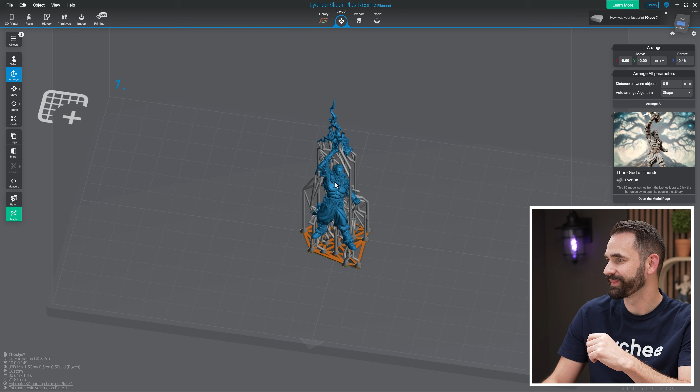So first thing, we need a model. For that, I'm going to head over to the Lychee Library and grab this Thor by Ever On. Just going to click on it right here and click on download. That's going to download one that's actually pre-supported. However, we want to learn something today, so I'm going to go through and delete those pre-supports. Let's click on them, go to prepare, grab them all, and hit delete.

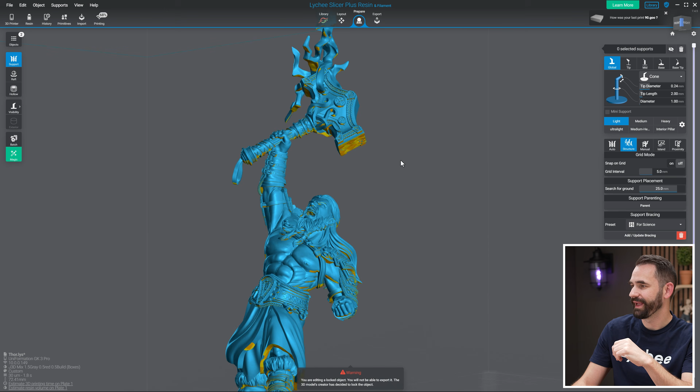All right, so the very first thing I need to do is make sure the orientation is what I want. Everyone has a slightly different way of doing it, mine might be different from this artist. The way to do this is I'm just going to look at it from underneath and see the overhang. So far, everything looks okay, but what I remember is that this guy has Thor's hammer. And if I look at it from the bottom, I can't really see the bottom of Thor's hammer from underneath this character.

So what that means is I'm going to go over to layout and hit R for rotate. I'm just going to tilt this guy over a little bit, maybe even back a little bit more until I expose that hammer. I want this edge right here to be visible from the bottom of the build plate. That way the supports can reach from the build plate all the way to the hammer.

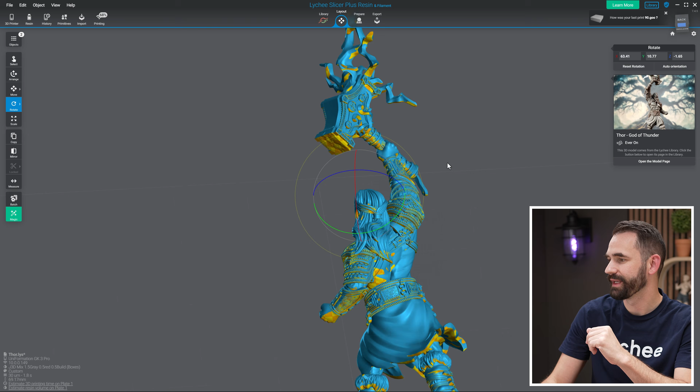So now that this guy's oriented in a way that I think is going to be a little bit easier, let's get to supporting. For that, I'm going to click on prepare, move my slider all the way up so I can get a full view of what's going on.

Now, just looking at this model right here, let's kind of explain what goes through my head. The first thing is, of course, I want the feet, the arm, and the hammer. These are what I call key components. If I support all of these key components pretty well, overall the vast majority of this model is going to print. After that, I'm only going to worry about the smaller islands and details, and I'm going to do it in that order: major key components, then smaller islands, then overhangs.

And then finally, at the very, very end, I might worry about stabilization, and I'll get to that part towards the end of this video.

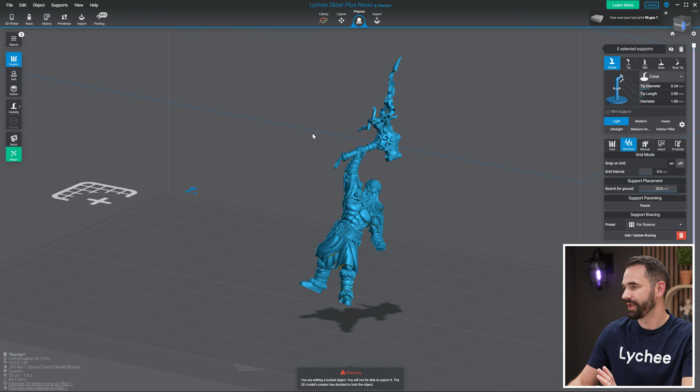So first, the key components we've identified are the arm, the feet, and the hammer. Let's isolate just the feet first to get an idea of what that looks like. I'm going to use the slider right here to drag it down until the only thing I can see are the feet. So these are the first things I want to support.

To do that, make sure support is selected, and I'm going to grab my heavy support. The reason for that being the bottom of these feet are never going to be seen in the light of day again once they're glued onto a base or something. So I'm going to use some heavy supports.

My heavy support tip is 0.4 millimeters. That's the largest that I use for anything from minis to massive models. The difference is that for massive models I use lots of supports, and for minis I'll just use less.

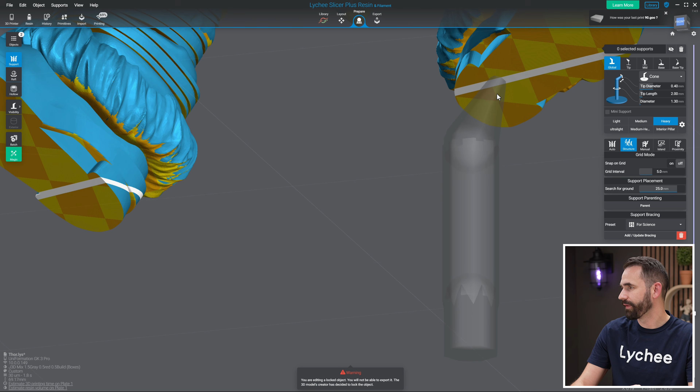First thing I want to do is grab the very, very bottom. To do that, I'm just going to move down until you see that white mark right there. That's the very bottom, that's where I'm going to place the support.

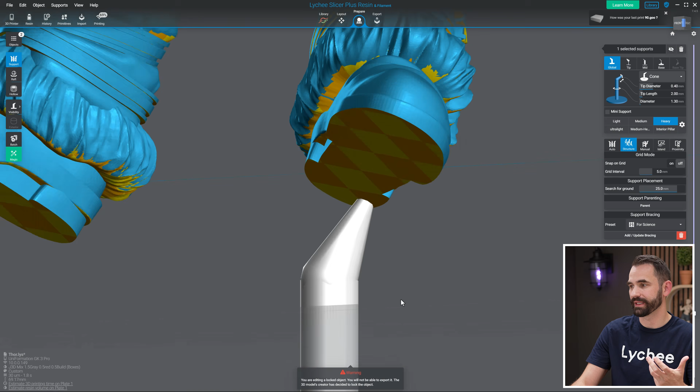Now I want to see this support from a different view. Wherever my cursor is, if I hit F on my keyboard, the camera is going to move and center on where the mouse was. That way, when I rotate, it's going to be centered around where my mouse was at the time. If I leave my mouse here and hit F, it moves, but if I keep hitting F, it doesn't do anything. If I move it around and hit F, it moves again. So that's a really good trick to center your camera.

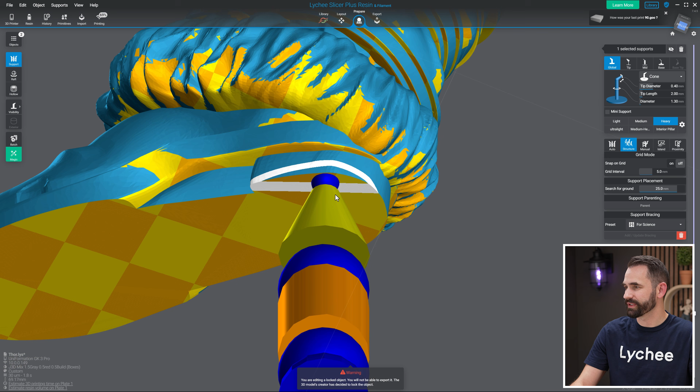From here, I can see that the support isn't overhanging. I wouldn't want it to look like this, where it's overhanging. I want it to be slightly underneath. If I want it a little bit further away from the edge, I'll hit space, make sure that support's selected, hit space, and then drag it further away, and it's a little bit better. From here, I'm just going to go through and place a few more supports.

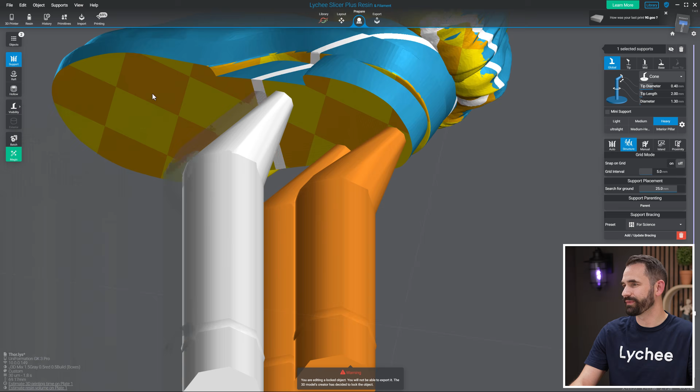Again, this is underneath the model, I don't care, so I'm going to kind of grotesquely over-support the feet here. We'll do the next one, same thing: click it, hit F, rotate. Probably could be a little bit further away, right there. Let's add a few more supports onto this foot just to over-support it, that way I know that leg isn't going to fail.

All right, so the legs are done. Also finished are the short supports. The short supports I want to be straight, but the taller supports I want to use the Lychee Slicer grid supports to save some resin and complexity and avoid some issues. So now I'm going to go over to structure and make sure I turn snap to grid on, and I'm going to keep it on for the rest of this video.

So now I'm just going to move the slider up and let's isolate that arm right there, because that's the next key feature moving up. Let's get that arm nice and centered, and let's kind of move this back down until that arm is isolated, just about right there. That's good enough. If I want to dial it in, I can use the up and down arrow keys on my keyboard to go through the layers one at a time, but right here is going to be good enough for what I'm looking for.

So now let's look at this arm and get an idea of how big it is. It's in a weird position where it's parallel to the build plate, the forearm right here. Not the best, but it's just the way it's going to have to be, for the reason of the hammer and some other reasons, it's oriented this way. But it's not a big deal.

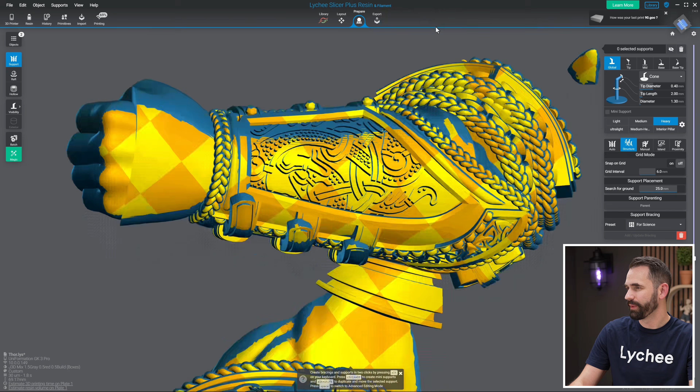The biggest island I want to think about right now is just this hand. So right here I'm probably going to place a heavy support. This might be the very last heavy I use for this entire model. We'll see how it goes. Actually, no, I might use one more here on the back of the arm, just as this thing's kind of big, and I want to make sure that both the hand and the elbow are well supported.

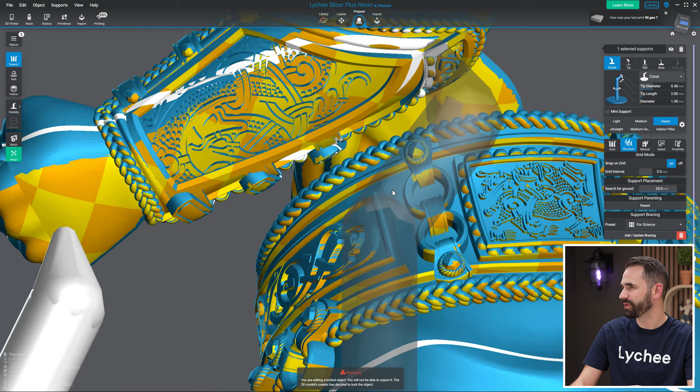And then the interior, I can use smaller supports, or between the two, smaller supports. So I want to try to squeeze one here in the back where it won't cause too much damage to the model. I think the best place for that is probably right here on the top. You can see my support tip is slightly bigger than the feature it's attached to, so I'm going to go down to a medium heavy, and that's looking a little bit better. All right, so I think that major island is done.

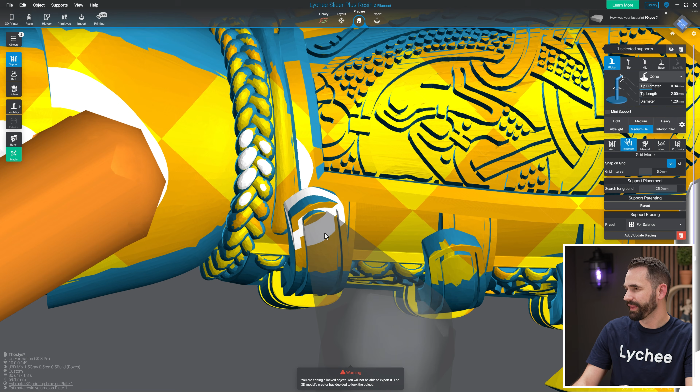Now let's move to some of these smaller ones. What I have right here is these belt buckles. I think they kind of stick out a little bit. They're going to be really easy to place a support tip to reinforce between the arm and the elbow. The medium heavy here is probably a little bit big. Let's go down to just a regular medium. That's looking better. We'll put one on each one.

And we can see here we got the snap to grid working, so these supports are kind of auto-parenting together. Let's move to the next key feature.

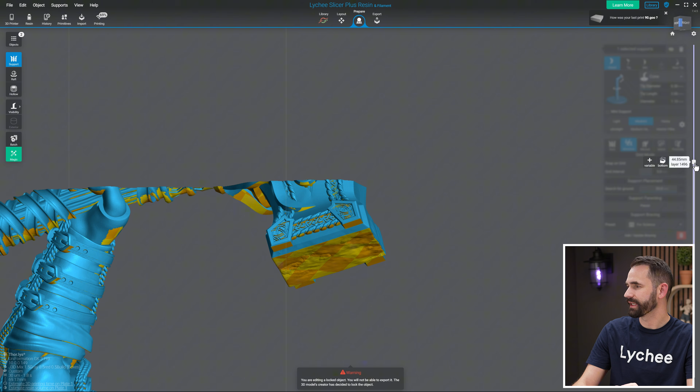That's probably going to be the hammer. So we'll scroll up, get that hammer right there. Let's move that back down, just get an idea of how big that is. That's the island we have to make sure we think it's going to print.

I'm going to start at the lowest point, and I'm going to go back to my heavy support. I'm probably only going to place one heavy support on the corner of this guy. Hit F on my keyboard. Let's make sure it's not right on that support tip right there. And I think from here we're going to move down to like a medium heavy and place one there.

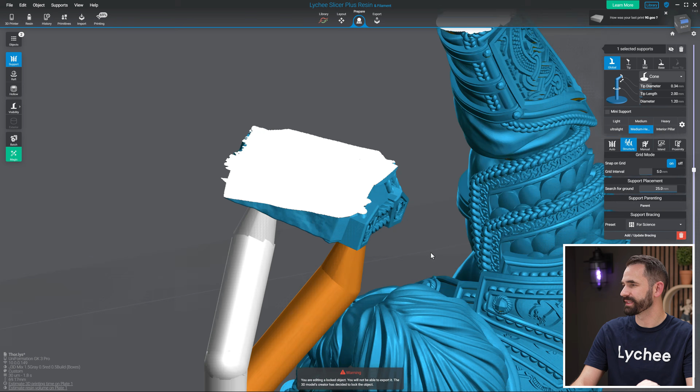If we move this down a little bit, what we're going to see is that the way this hammer prints, or the way it's supported, is it's kind of coming up like a little bit of a triangle, where this is the lowest and this corner right here is printing last. You can kind of tell by the shape. So if we support the part that's lower on the build plate first, it builds onto itself. By the time we get to this thing right here, what that means is as I get further and further away from that bottom tip, I can use smaller and smaller support tips.

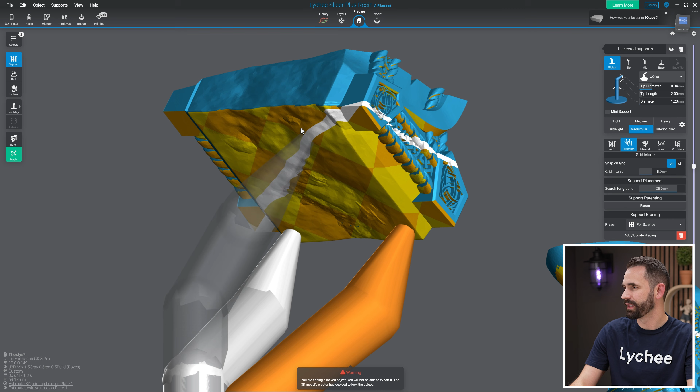So if I come up here, maybe like halfway between these two, I'm going to need another one. And this one I think I can get away with a medium. And then one kind of in the center, because remember, this is building up as a triangle. So maybe one in the center. At that point, I can go to a much smaller support tip, because at this point, I'm pretty sure this thing would print. I'm worried more about overhang, layering, and flaking. But this key component at this point is probably done.

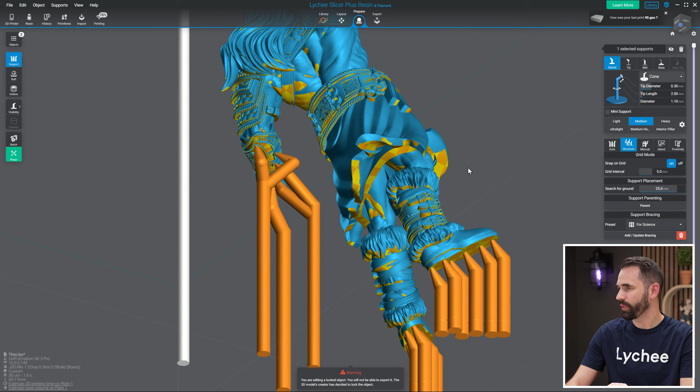And so we'll come back to the overhangs and islands. So let's just make sure there's not anything else that I could consider to be a key component. Quite possibly the back of his cloak right here could be a key component right down here. So let's try to isolate that one again. Move my slider down. We can see what just that looks like. It's a pretty big overhang right there that really sticks out. It's not very heavy because it's kind of thin.

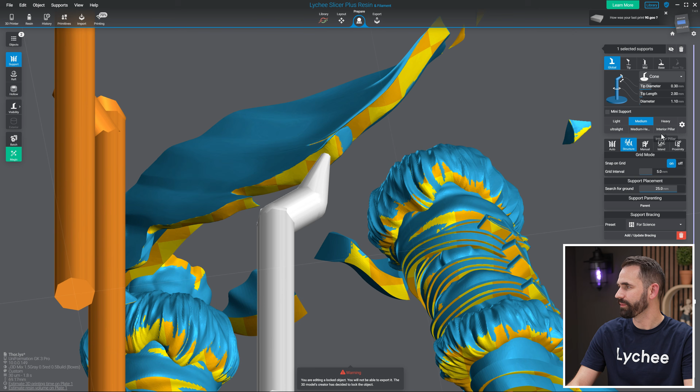But let's place at least one medium heavy there and one there. Maybe one more on this side of it, just like right there. And I think that's it for that one.

There's obviously some islands that haven't been supported yet. What about the front of his cloak? Yeah, we probably got one thing just right there and one more right there.

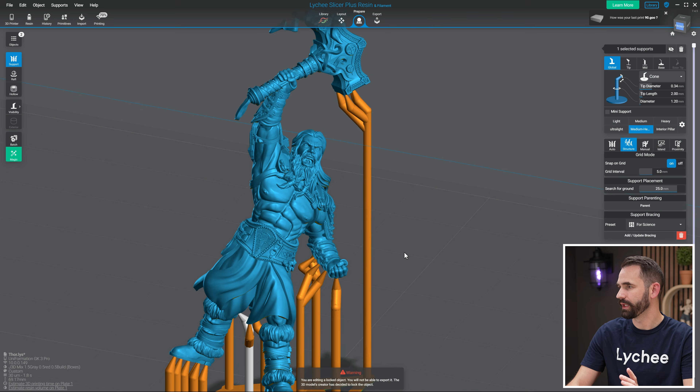So I think as far as the weight is concerned and the pull force, we're taken care of. Now we're going to start searching for islands and overhangs and stuff like that.

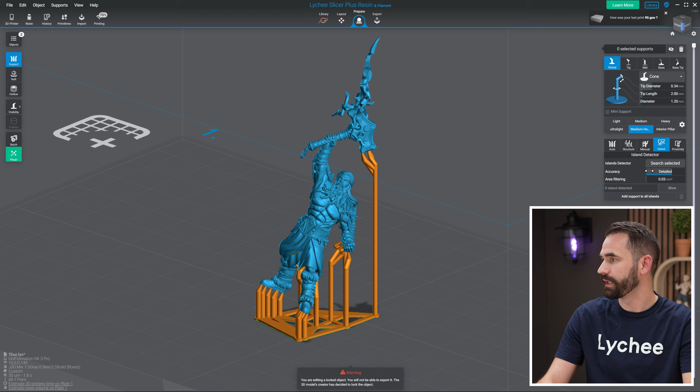For that, what I'm going to do now is I'm going to click on the model, go over to island, and I'm going to do a detailed island search with a filter on of 0.03 millimeters, which means any islands that are less than 0.03 millimeters squared, not cubed, squared, will be filtered out. Let's click on search selected. And now I've got 49 islands that haven't been supported yet.

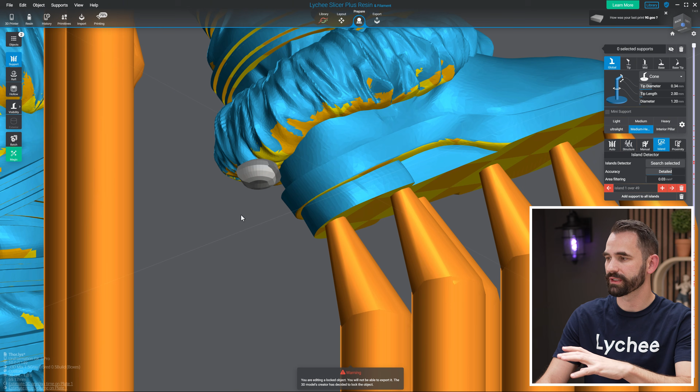This is where I can just click on show, and it's going to go through and start cycling these islands. I can look at each one individually and determine which size of support tip I want to use, just based upon what I'm seeing. The foot right here is going to be supported by these larger ones. So by the time we get here, it doesn't need much.

So I'm just going to place probably a light. Let's delete that, not the best way to do it. I'll put it right on the bottom, just like that.

And since we've got a bit of an overhang here, I can just do 3 of them. The light supports are very, very small, so I'm not worried about support tip damage.

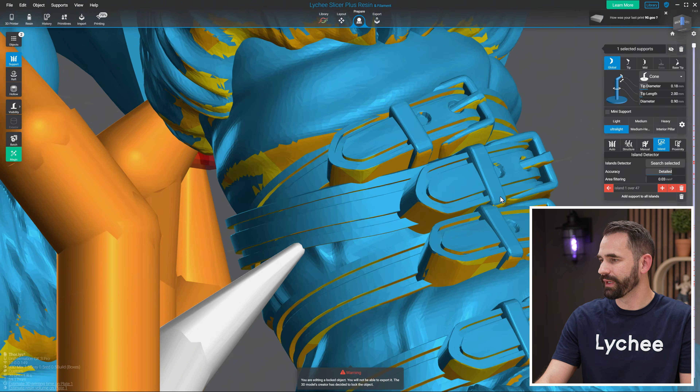When we come up to this one right here, this one's very tiny. I may put ultralight, and honestly, I may even move that one a little bit and make it even slightly smaller. That is a tiny overhang, may not even be worth doing in the first place, to be honest.

When we come up to these bigger overhangs on the back of his cloak, I'm probably going to want something a little bit bigger, so let's reset that back to light. The one down here, it's kind of behind it. Let's probably put that one as a medium because we're on this.

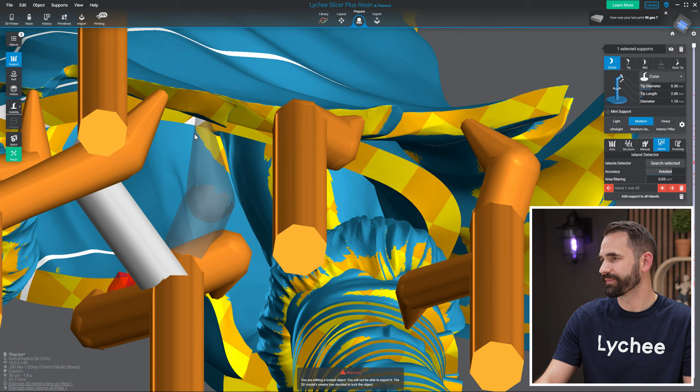It's hard to tell, but there's actually 2 layers to this tunic he's got on. So for this bottom one, we just want to make sure we get a few supports on it. I want that to have a path to the ground right there.

Getting a little close, we can just move it over like that. We can probably recalculate this guy. There we go, that's better.

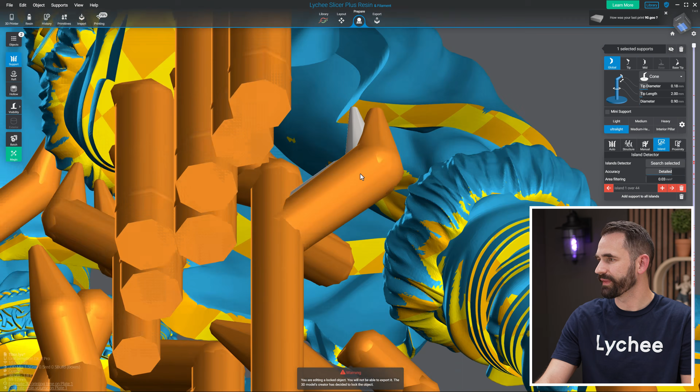And we got a little island right here on the tip. That's probably going to be like an ultralight, really, really small support tip right there. We probably want it right in the center. Just right there is enough to get the very bottom of that cloak going.

We got another one right here, I'll probably just put another little tiny support there. That's probably okay, and then one more in between the gap. That's just because I don't trust that one support tip, this little one right here, to do all the work, so I'm going to have the other one next to it just to kind of help it out.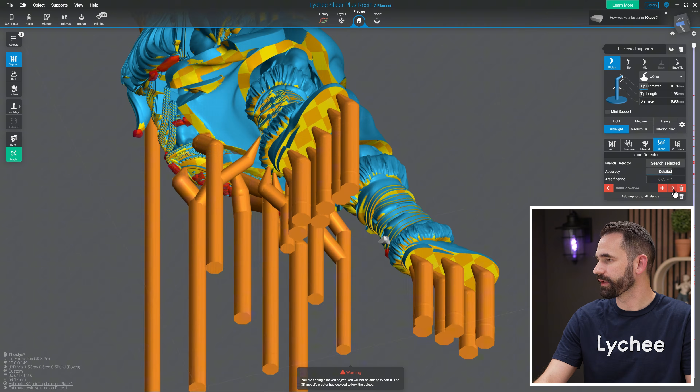All right, let's click on our arrow and look at the next island. Oh, we're here on the other foot. These are really, really small. I don't know if I really need that, that one's so small. We'll put ultralight, same thing on this one, ultralight.

That's not an island there, I don't have to worry about that. That's the bottom half, let's move up.

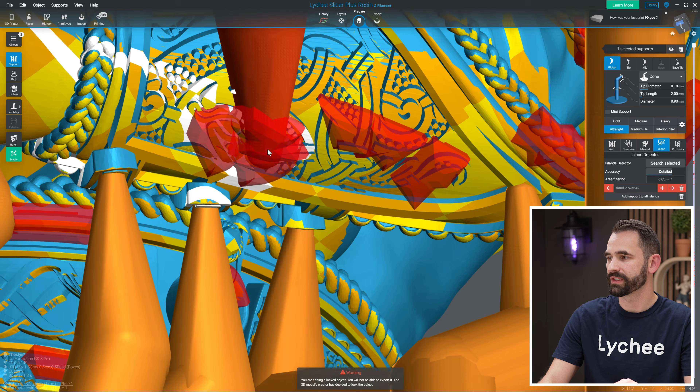We've got this texture right here on the arm. For the texture, this is where I don't want to be plastering supports all over it, you know, something like this where I'm just making a big mess of it, and now I've got all this damage on the texture.

I really only need a couple, and I'm also going to make these support tips really, really small. So, see how I got some support structure underneath it? I can actually use that to make a different type of support.

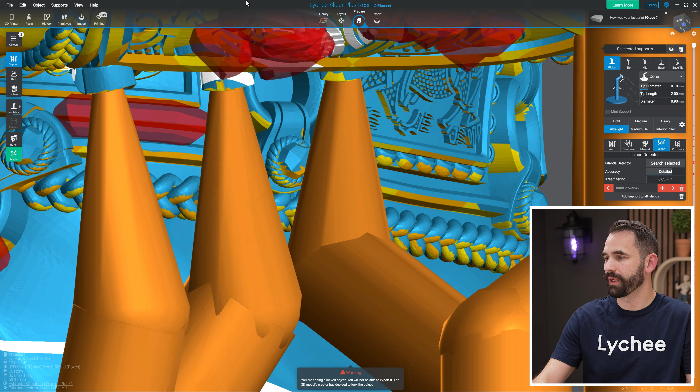So what I'm going to do to get this going is I'm going to place one support tip right here. See how this connects down there on that existing support shaft? I can even drag that around if I want to.

Now what I'm going to do here is make this ball smaller and make the support tip even smaller. Let's say like 0.14, let's go all the way down to 0.12. Really, really small support tip.

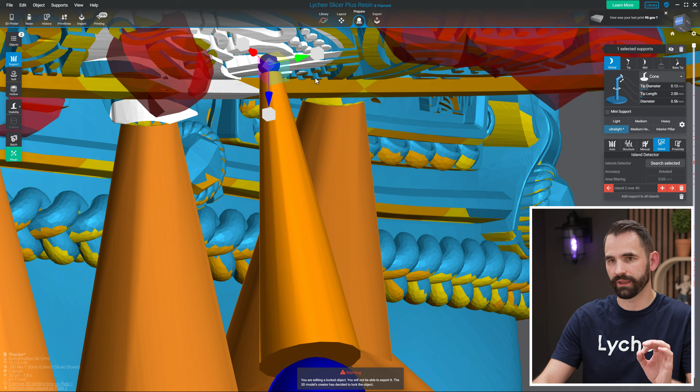Now with this one selected, I can move it around to a better spot. Let's probably put it maybe right here. Now with this guy selected, I can make copies of this one.

So basically what I'm going to do is copy this one all the way down from the support tip size down to where it's connected to this larger support shaft. And that's going to make it really, really easy to place a bunch of these.

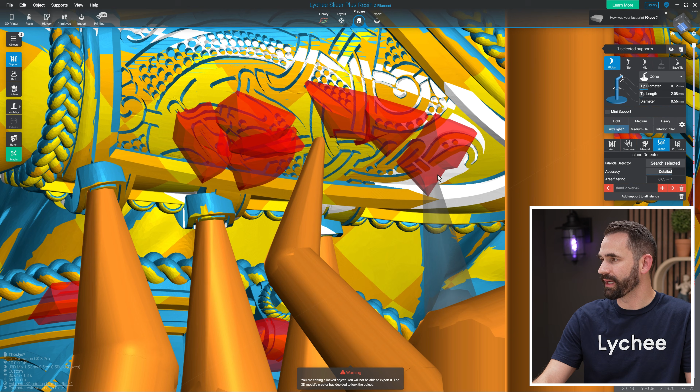And I do that by holding Shift and Alt, and it's going to make a copy of that one. And I can come through here and just kind of place these. There's not like a great place to put them, there's really bad places and not-so-good places, and that's a bad place.

Delete that one, replace it maybe right there. It's kind of hard with the way that texture is doing it, but that's probably good enough right there. Now let's get this arm.

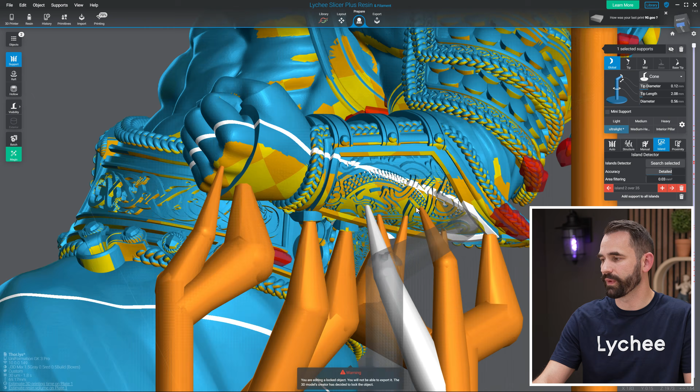If I just don't change anything, I'll use the last one I used, this guy right here. I don't want that for the knuckles, so I'm going to go back and just re-click on ultralight and replace it.

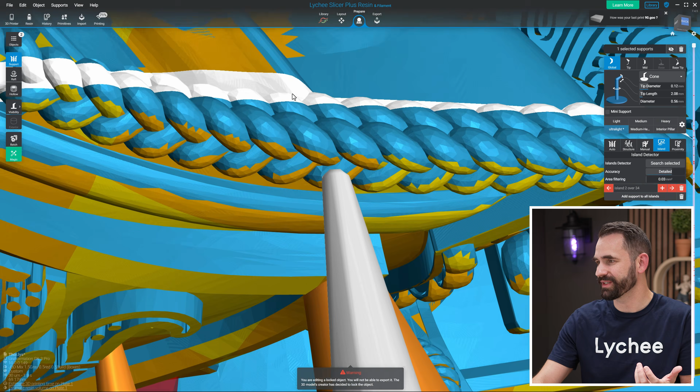Now let's go over to the texture here. This texture is super small, tiny. Even if I go back to this really small tip I made and put it on, you'll see the support tip itself is almost as big as the texture. So I'm probably going to go even smaller on that one, maybe 0.01, as small as I dare to go.

I can do the same thing as before, hold Shift and Alt, and place a couple of them here. I don't think I need that many. At that point we're probably done. And I can even hold Shift and Alt and do the same thing on the ones up here, just place a couple of them.

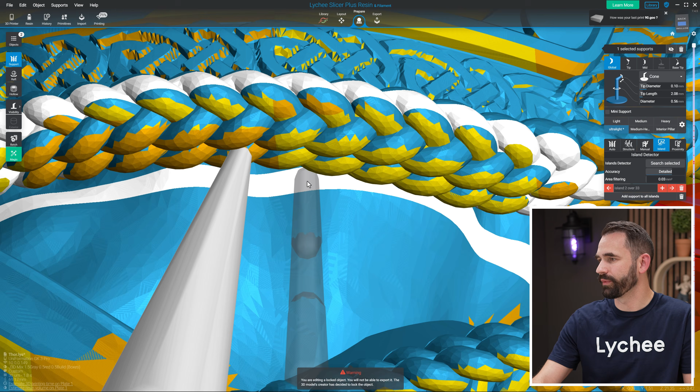I'm probably putting more damage on this model than I'm actually saving by hitting all those islands, but at least it's going to help with this whole overhang right here. Because I don't want this whole armor plate to fail, so these support tips on the islands are also going to double up as keeping that piece of armor from failing and grabbing a few of those islands. I think that's going to be enough to do it, just like that.

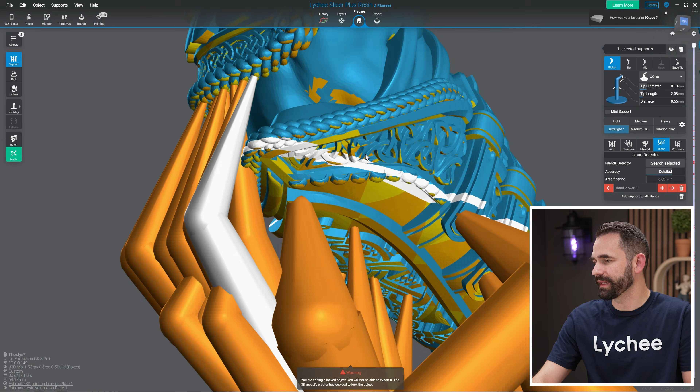The next thing moving up is we've got this hair. That hair is a little bigger. Let's go back up to my light and position it where I want it to be. That's a big piece of hair for one support — I don't trust one support to do a full structure.

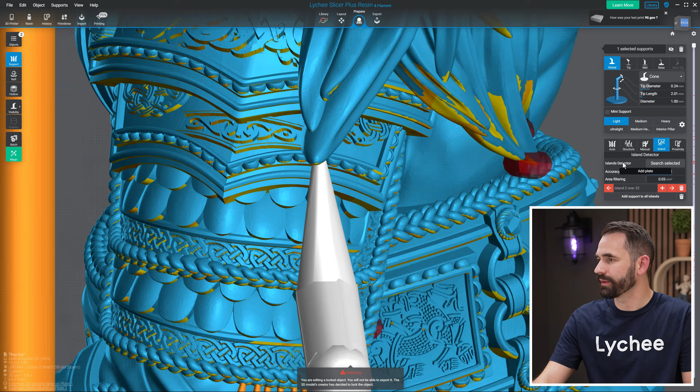So I'm going to come in and add one more, a little bit higher, probably at a different angle, something like that. And this one's going to be an ultralight, very small. I trust two — I don't trust one, but I can trust two.

Over here, this is a little bit larger. Let's see, do I trust a light on that? I'll trust a couple lights — do like two there, one there, one there, and probably one more.

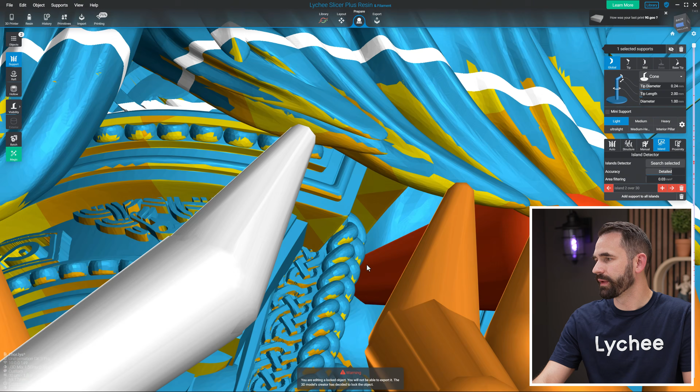Let's see, does that make connection with the body? No, it doesn't. That's a small island right here — let's make that an ultralight, and even smaller right on that very, very small island right there.

I trust that. Underneath the arm, kind of under here, we've got some armor plating and some rings. We're just going to go through and place a couple support tips on that. These are tiny, really, really small. Let's place a couple minis, like three minis. Okay, that's good.

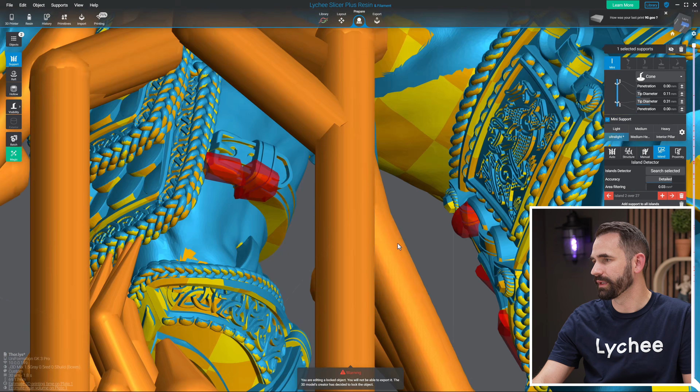The belt buckle is so tiny. Let's see, do I have a good way for that? Yeah, we'll do another mini, right on that belt buckle. I don't like where that placed — let's readjust that, like right there.

Okay, that's probably done, and you can see right now I'm just going through and filling in all these tiny islands at this point. I'm using some really small support tips on really small islands, and slightly bigger ones elsewhere. But as you can see, everything's on a case-by-case basis — there's not just one support tip size you can use to blast everything.

I don't like supporting that way. I like doing everything on a one-by-one basis. It does take longer, but ultimately I think the end result is significantly better.

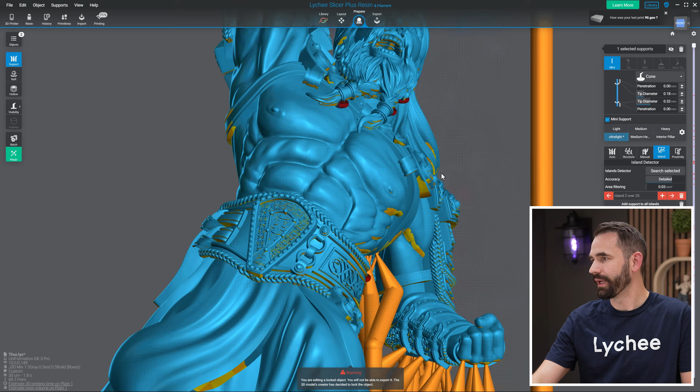Moving up, there's 25 left. I probably won't hit all 25 of them, to be honest. We've got a little belt buckle ring — I probably want that one to be an ultralight. Let's click on that, yeah, it's going to be fine.

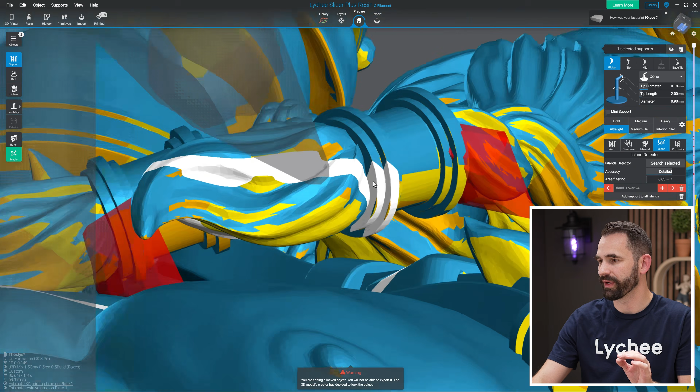All right, we've got something in his beard, if I remember right — we have a couple in his beard. Now, sometimes you have to place a support that's going to stay on the model permanently, just kind of hidden underneath features. An example of that is his beard right here. Right here there's a little bit of an overhang. If we place a support tip right there, you can kind of see it's — I don't know if you can see or not, it's hard.

But with this model, you're never going to see that support tip, it's just going to help the thing print. There's a couple underneath his beard we're going to grab that are going to be the same way.

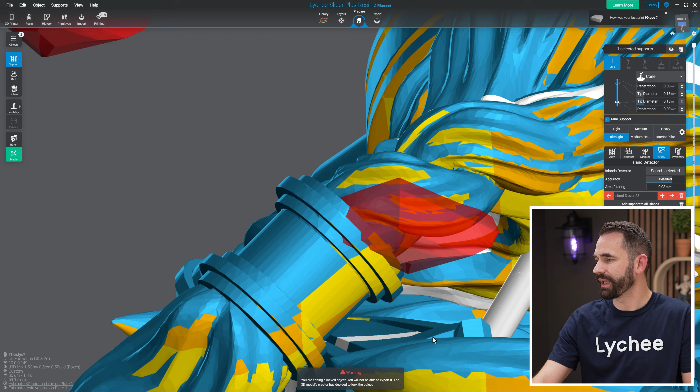I'm going to snap it there, and if I hold down Control and Alt, I can actually control where the base goes. I put that tip in the wrong spot, let's do that again. There and there. Let's hide that one a little bit better. There and over there. Oh, I keep missing that one.

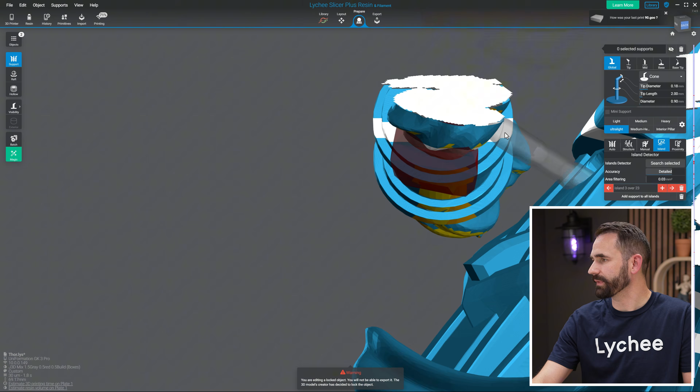Let's change our approach on this one. I'm going to take my clipping down so I have a better idea of what's going on, change my angle, and now I can see the very bottom of this guy. That's a much better approach, just changing the clipping so I can see what's going on.

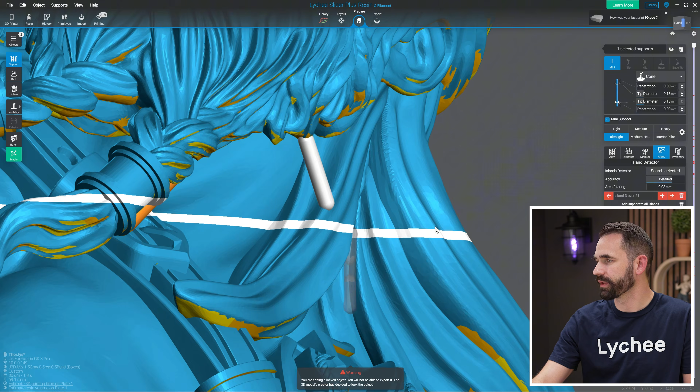We've got one more little tuft of hair right here. I'm going to place it there and find a good spot. There's not a great spot for that one, wherever I put it, it's going to cause some damage. Maybe right there, you won't notice the damage as that support tip breaks off. Let's make this thing just a little bit smaller. That's one of those ones where maybe it's better if I actually leave that one unsupported. If this little tip flattens out by a couple layers because it's unsupported, I think that's going to look better than some damage from removing that support tip. So we're going to leave that one undone.

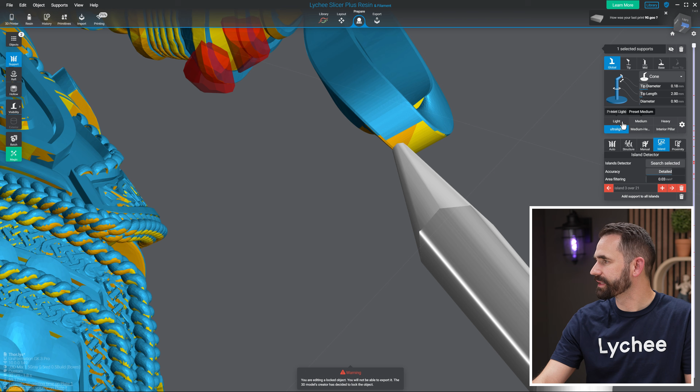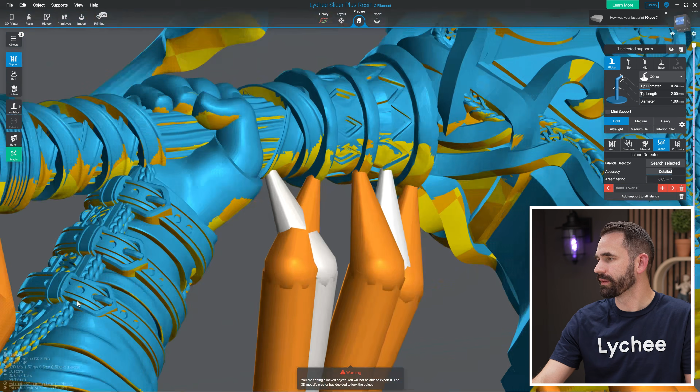Now let's move to a light in between these guys. If I want to, I can come in here and adjust these support tips just so they're a little bit more onto the features. And one more mini right there. Okay, that's going to be good enough.

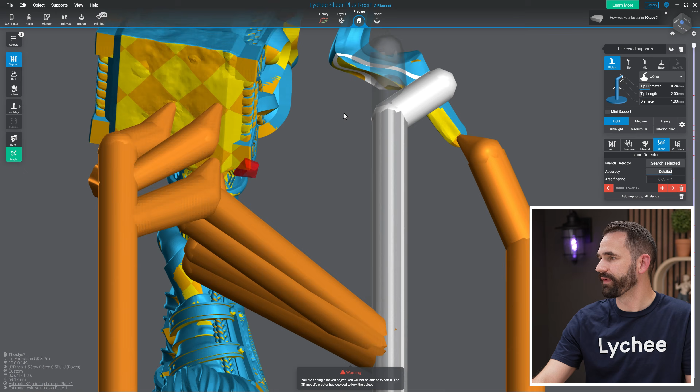Now let's get the lightning bolt. We're going to do probably a medium on that guy, and then some lights up above the overhangs just to make sure we don't get a failure there. Let's get one more next to the medium, little extra structure, a little extra support. And moving up, let's do 2 there, 1 there, we don't need much. There's a lot of structure of the lightning itself that's going to help us out there.

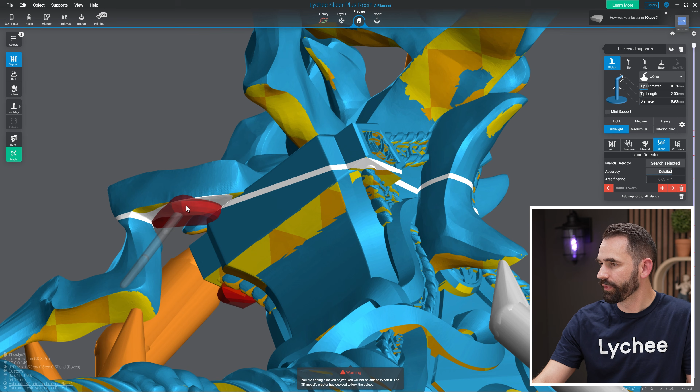Let's move to ultralight on these little tiny islands. We've got an overhang, looks like we could reach the overhang with a path to ground, that's good. Same there, that one I'm not going to support. And I am going to grab that right there.

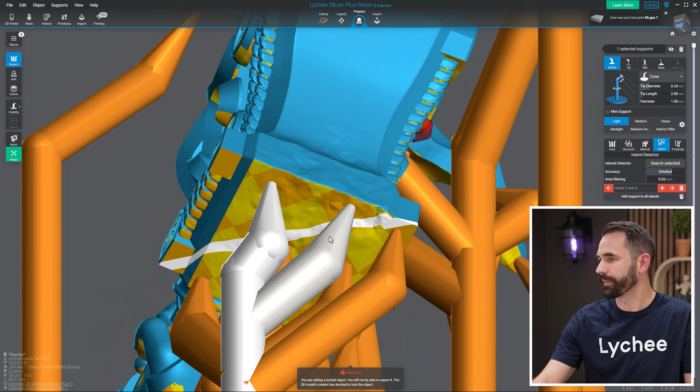Okay, so now I want to get the overhang of the rest of this hammer. I talked about that earlier, that I'll come back in and fill this one in. I'm going to be using a light on that, and we'll go through and just place a few more just for that overhang. Just like that, and that should be more than enough. And those lights are going to come off really easy, it's just to make sure I don't get any layer peeling.

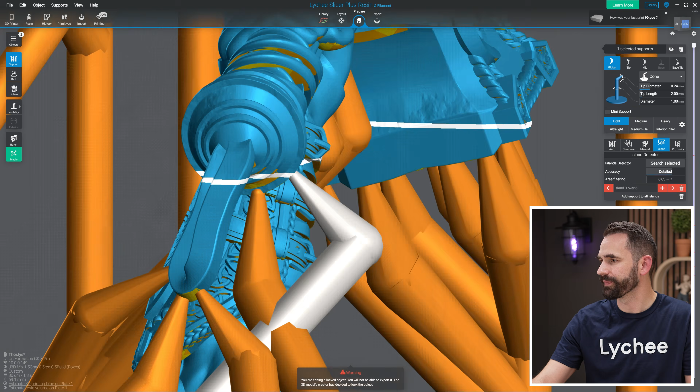When I look at this from far away, I'm not super satisfied with this stability, so let's add a couple more lights. Just like that, same thing on that one. I'm not satisfied with this being super stable with just one support tip, so I'm going to add a couple on each side, and then maybe further down a couple more, just until I feel like that haft is a little bit better off.

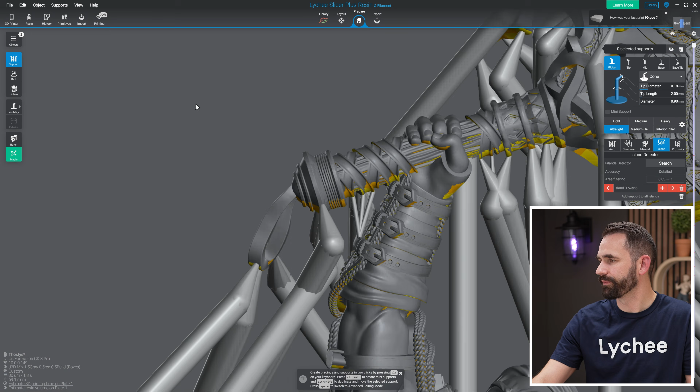We may even have to come down here and do something like this. Let's go ultralight, move that down to the very end and then just place something like that. Not a lot of support damage, I think it's going to work out just fine.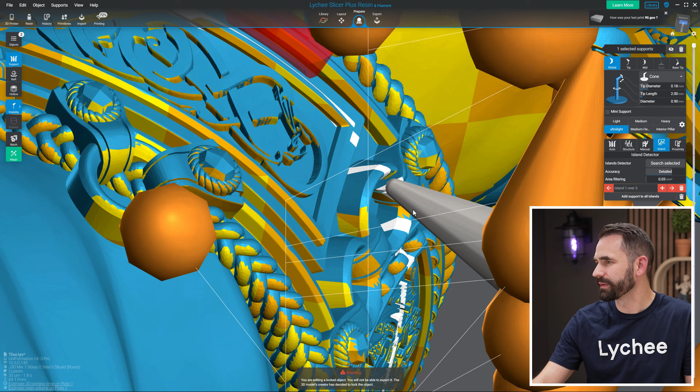So I can kind of look at it without the overhang, without that orb thing on it. Let's see, I don't love that either. And then one more right there. Move that up a little bit, shrink it down. All right, change my visibility to show all again.

Okay, so now we've basically got this guy. He's pretty much all done and supported. The only thing we need to do now is add some bracing so these really, really tall ones right here don't kind of wobble around and cause issues.

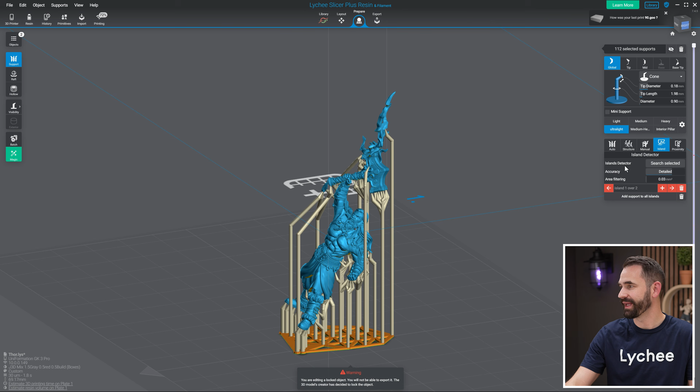That's really easy to do in Lychee Slicer. I'm just going to go over to structure, and here there's some presets. To give you an idea of what these presets can look like, let's do the default bracing. Make sure I select him, click on add update bracing. And you see the bracing right here is actually pretty good.

This is going to be very structural. But for me personally, I think it's a little too structural. And again, that's just my own opinion.

I like to use one that I called For Science that I created in another video.

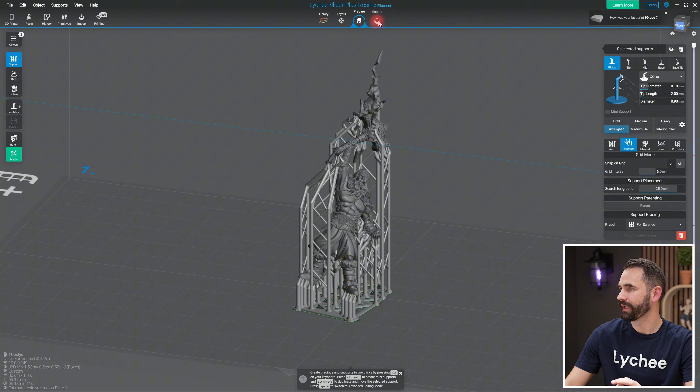And now that it's all supported, all I have to do is print it. For that, I'm going to go over to Export. Make sure that I select the printer that I want to use. For this one, I'm going to be using the GK3 Pro, and I'm going to be using this resin profile right here, which is a blend of some resins I've been playing with right now. I'm just using it because it happens to be what's in the printer. I'm going to be doing it at 30 UM.

So let's get this guy slicing, and then let's also look at that time lapse that I recorded during this print.

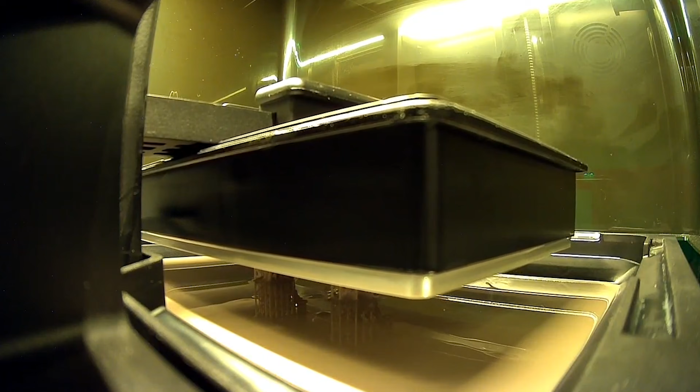So what I would do here is I'd open up the .lys that I always save, go back in, add a few more supports right there on the chin, reprint it, and then I would call it good. But as of right now, let's just see how easy these supports are to remove.

I'm gonna start just by kind of removing the supports off of the hammer. I like to do it this way if I'm actually taking my time, and just kind of slowly peel them away from the model. This is because if I rip the model straight out, sometimes those supports, they're like little claws, they can kind of scratch it when it's coming down.

So I take the taller ones and I just kind of rip them out like that. Once I get those ones freed up, the rest of the body should just come off without really any issue whatsoever. And there we go, he's free now from all the supports.

And ultimately, he turned out really, really well. Yeah, the only issue I have right there is on the beard itself. So yeah, I'll just go fix that, reprint it, and I think I'll have myself a really good mini. There we go. Not that you'll see him back there anyway.